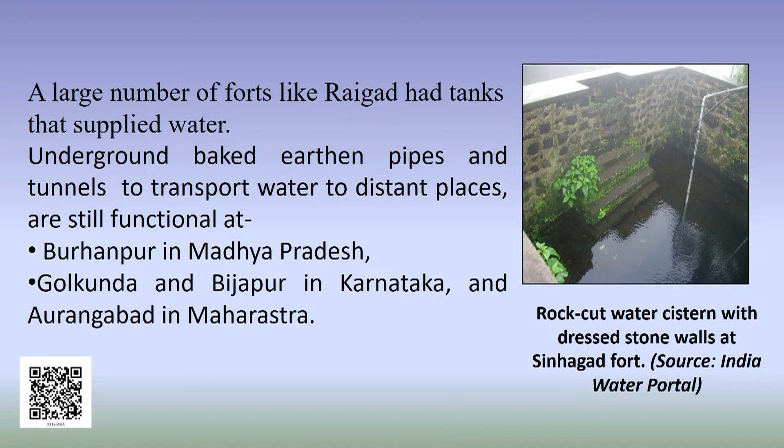Each fort in the area had its own water harvesting and storage system in the form of tanks and wells that are still in use today. A large number of forts like Raigad had tanks that supplied water. Underground baked earthen pipes and tunnels to transport water to distant places are still functional at Burhanpur in Madhya Pradesh, Golkunda, Bijapur in Karnataka and Aurangabad in Maharashtra.

There are some other water harvesting systems found in other states also: Jal Talai in Uttar Pradesh, Haveli system in Madhya Pradesh, and Ahar in Bihar. All are water collecting or harvesting systems. Jal Talai: a reservoir area of less than 5 bighas is called a talai.

Haveli system is a traditional rainwater harvesting and cultivation method native to the Bundelkhand region of central India, especially in Uttar Pradesh and Madhya Pradesh, and it has been practiced for over 300 years and is deeply rooted in the region's agrarian culture. Haveli system acted as a reservoir during monsoon and a cultivable land post monsoon, with provision made to drain out impounded water.

Ahar refers to a traditional agricultural system in southern Bihar using channels and retention ponds to manage water resources, and is also a reservoir with embankment on 3 sides, built at the end of drainage lines such as rivulets or artificial works like pynes. Under the system, channels are dug into the soil, allowing water to flow with raised embankments on the sides. These channels are interspersed with small retention ponds useful for collecting excess water.

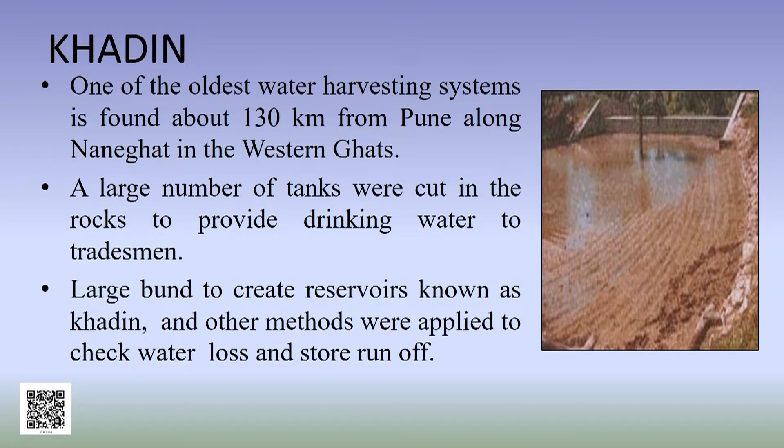Next system is Khadin, and it also is one of the oldest systems. It is found about 130 km away from Pune along Naneghat in the Western Ghats. A large number of tanks were cut into the rocks to provide drinking water to tradesmen, large bunds to create reservoirs known as Khadin, and other methods were applied to check water loss and store runoff. So now we have discussed traditional methods of water harvesting.

Now we will move to modern methods of water harvesting, and there are 2 main techniques of rainwater harvesting. First, storage of rainwater on the surface for future use, and second, recharge to groundwater. Storage of rainwater on surface is a traditional technique, and structures used are tanks, ponds, check dams and many other forms. Recharge of groundwater is a new concept of rainwater harvesting, and the structures generally used are pits, aquifers, trenches, dug wells, hand pumps, recharge wells, recharge shafts, lateral shafts with bore wells.

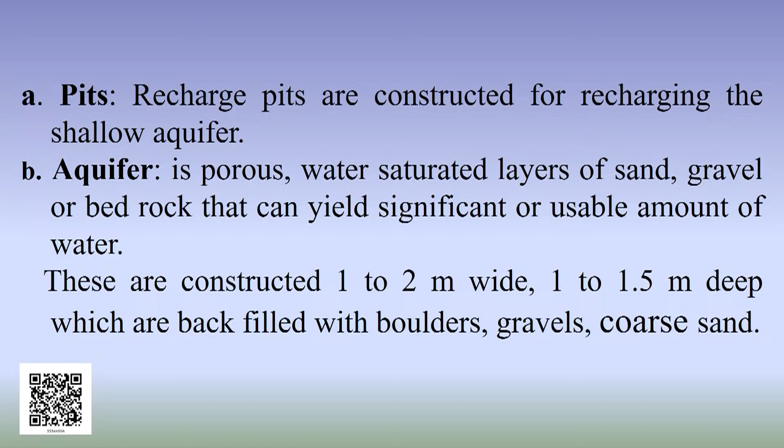So, we will discuss a little bit about pits, aquifers, trenches, dug wells, because we have already talked about tanks, ponds, check dams. So, first we will take pits. Pits and recharge pits are constructed for recharging the shallow aquifer. An aquifer is a porous water saturated layer of sand, gravel or bedrock that can yield a significant or usable amount of water. These are constructed 1 to 2 meters wide, 1 to 1.5 meters deep, and backfilled with boulders, gravels, coarse sand. Water from the rooftop is collected in a recharge pit, where boulders and charcoal filter the water.

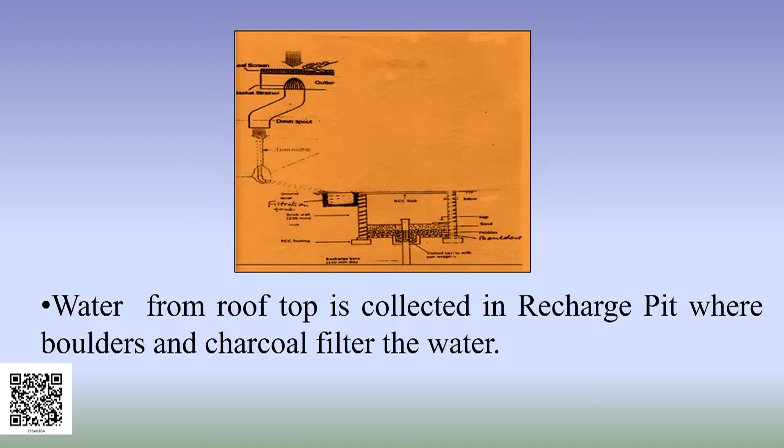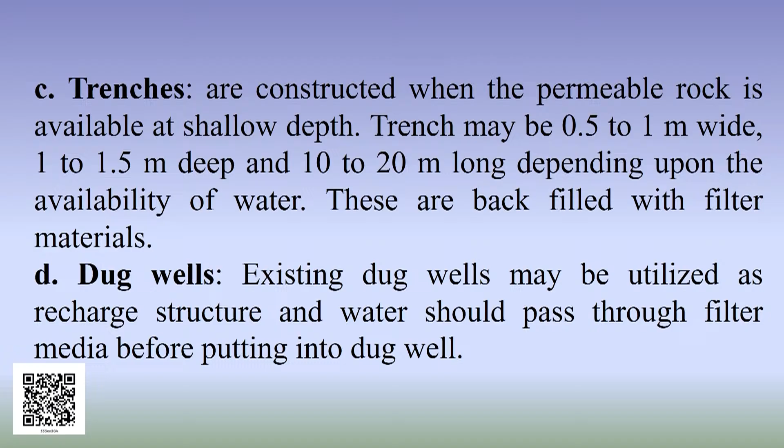Next is trenches. These are constructed when permeable rock is available at shallow depth. A trench may be 0.5 to 1 meter wide, 1 to 1.5 meters deep and 10 to 20 meters long, depending upon the availability of water. These are backfilled with filter materials. Next method is dug well. Existing dug wells may be utilized as recharge structures, and water should pass through filter media before putting it into the dug well.

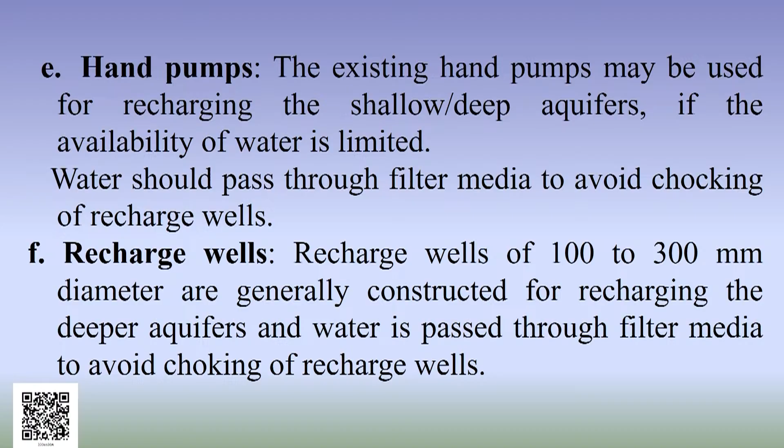Hand pump: most of the population use hand pumps nowadays too. The existing hand pumps may be used for recharging the shallow or deep aquifer if the availability of water is limited. Water should pass through filter media to avoid choking of the recharge well. Recharge wells of 100 to 300 millimeter diameter are generally constructed for recharging the deeper aquifer, and water is passed through filter media to avoid choking of recharge wells.

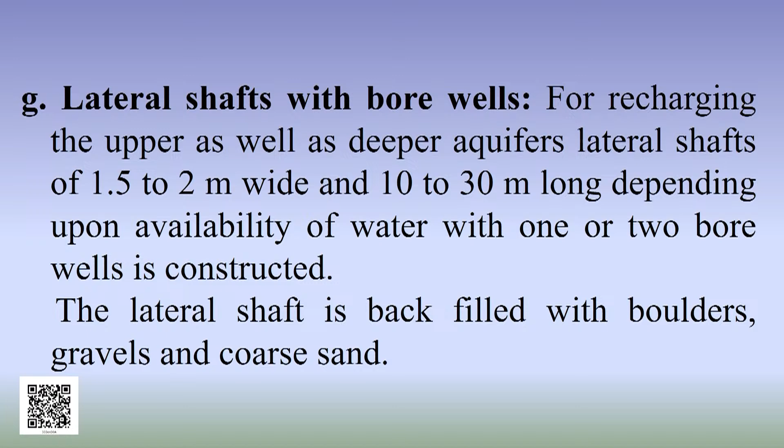Recharge shafts are for recharging the shallow aquifer which is located below the clay surface. Recharge shafts of 0.5 to 3 meter diameter and 10 to 20 meters deep are constructed and backfilled with boulders, gravel and coarse sand. Lateral shafts with bore wells are for recharging the upper as well as deeper aquifers. Lateral shafts 1.5 to 2 meters wide and 10 to 30 meters long, depending upon the availability of water, with 1 or 2 bore wells are constructed. The lateral shaft is backfilled with boulders, gravel and coarse sand. So, the storm runoff may be diverted into the nearest tank or depressions, which will create additional recharge.

Now, we will discuss the diversion of runoff into existing surface water bodies and its benefit. Construction activity in and around the city is resulting in the drying of water bodies and reclamation of these tanks for conversion into plots for houses. Free flow of storm runoff into these tanks and water bodies can be used as a harvesting system.

In urban areas, construction of houses, footpaths and roads has left little exposed earth for water to soak in. We feel it when heavy rain is coming, but all rainwater freely flows to the drains. In the case of rural areas of India, flood water quickly flows into the rivers, which then dry up.

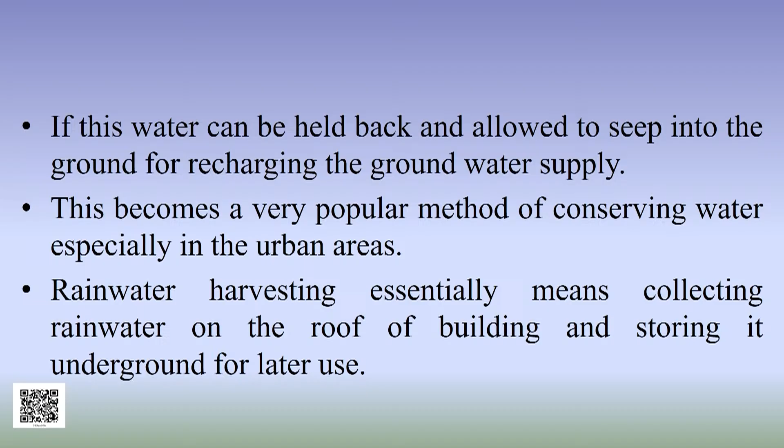Soon the rain stops. If this water can be held back and allowed to seep into the ground for recharging the groundwater supply, this has become a very popular method of conserving water, especially in urban areas. Rainwater harvesting essentially means collecting rainwater on the roof of the building and storing it underground for later use.

So, realizing the importance of recharging groundwater, the Government of India and many state governments, NGOs and other institutions are taking steps to encourage rainwater harvesting in the country. Town planners and civic authorities are introducing bylaws making rainwater harvesting compulsory in constructing new buildings. No water or sewage connection would be given if a new building did not have provisions for rainwater harvesting.

There are some benefits of rainwater harvesting in the form of increased water availability; it checks the declining water table and is environmentally friendly. It improves the quality of groundwater through the dilution of fluoride, nitrate and salinity, and it prevents soil erosion and flooding, especially in urban areas. So, there are several case studies regarding rainwater harvesting. We will take one or two during this program, and these are the success stories.

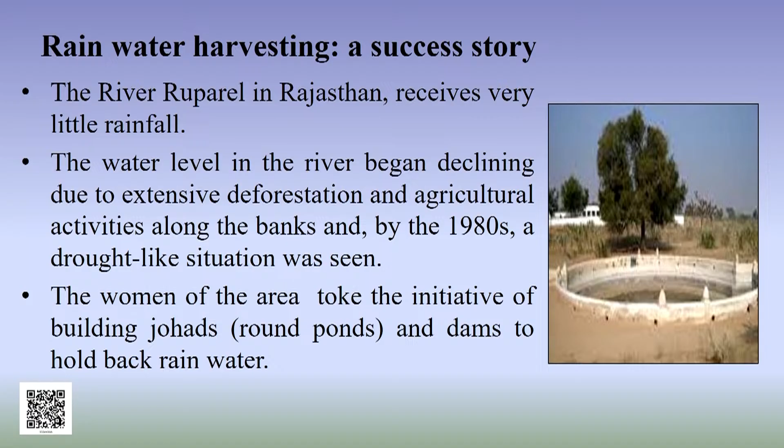The first success story of rainwater harvesting is river Ruparel in Rajasthan. This region receives very little rainfall. Water level in the river began declining due to extensive deforestation and agricultural activities along the bank, and by the 1980s drought-like situations were seen. The women of that area took the initiative of building johads, or round ponds, and dams to hold back rainwater. So, due to water conservation, water is available throughout the year.

The second case is related to Rashtrapati Bhavan, which was done by the Center for Science and Environment, a New Delhi based NGO. Center for Science and Environment recommends the revival of traditional water harvesting systems along with modern technologies. In 1998, the then President of India asked Center for Science and Environment to design a rainwater harvesting system in Rashtrapati Bhavan, New Delhi. The presidential estate is a large area and receives around 800 million liters of water per year in the form of rainfall.

Rainwater from the roof and paved area surrounding Rashtrapati Bhavan is diverted to an underground storage tank for its low quality use. Water passing into the recharge well is passed through a desilting tank to remove pollutants, and CSE also helped rainwater harvesting systems in schools under the Green School program to drain water from lawns. Some of the initiatives taken by CSE are in the colonies of Vasant Kunj, apartments like Surya Vihar, institutions like Ford institution, universities like Jamia Hamdard University, clubs, hospitals, industries and slums too. So now we will take another successful and famous case study, that is Tarun Bharat Sangh or TBS.

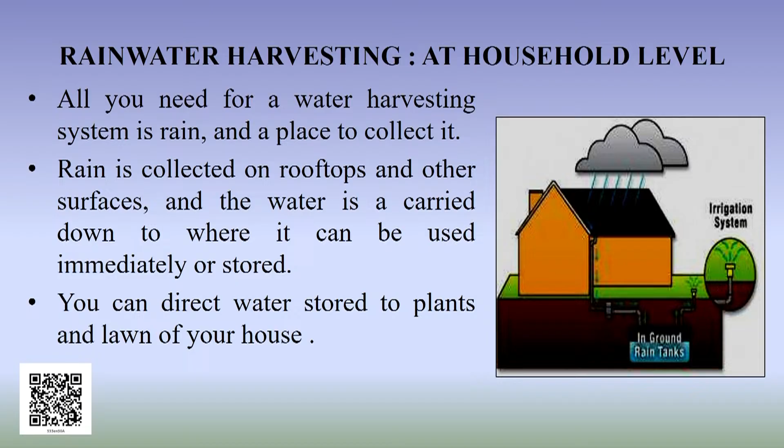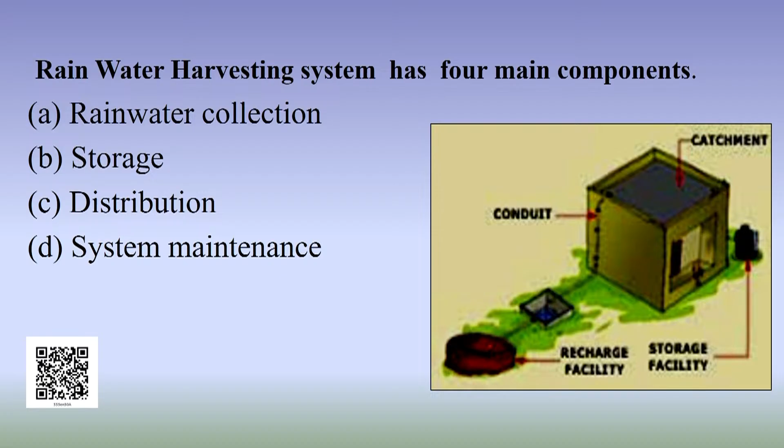We know all a water harvesting system needs is rain. Rain is a must, and a place where it is collected. Rain is collected on rooftops and other surfaces, and the water is carried down to where it can be used immediately or stored. You can direct stored water to the plants and lawn of your house. So a rainwater harvesting system has four major components: first, rainwater collection; second, storage; third, distribution; and fourth, system maintenance. We will discuss a little bit about each component. First we will talk about rainwater collection.

One can capture rainwater from any roof area, patio, driveway or other impermeable surface. Make sure that collected water is kept at least 3 feet away from the foundation of your house. The amount of water you will be able to harvest depends on the size of your catchment area. To determine the amount of water you can collect, multiply the area of your roof in square meters times the amount of rain received each year in meters.

So next, multiply these values. Suppose you have rainfall; we know India has rainfall of 1170 millimeters. Multiply these values by 0.909 to account for evaporation and other losses, and then multiply this result by 1000 to determine the number of liters. So when we multiply these figures, we find 1,05,300 liters of water per year.

So next we will talk about storage. Storage systems can vary in complexity depending on one's need. An effective system can involve a 250 liter drum fed by rooftop gutters and downspouts. A more involved system might include buried cisterns, plumbing and a timed watering system. Debris and leaves should be filtered before storing the water by placing screens over gutters or downspouts.

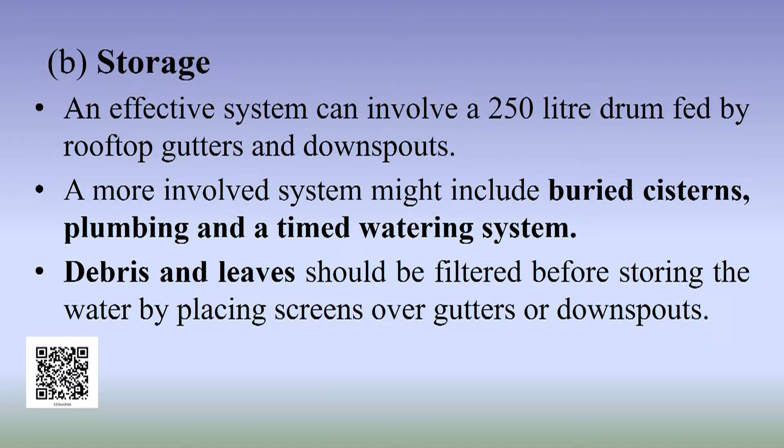Water kept in tanks or cisterns should also be covered to minimize algal growth and eliminate the potential for mosquito breeding, to avoid dengue and malaria. Placing lids on the storage tank is an effective solution. So now we move to the next component, that is distribution.

Gutters, that is a narrow channel which collects rainwater from the roof of a building and diverts it away from the structure, typically into a drain. Downspout is a vertical pipe for carrying rainwater from a rain gutter to ground level.

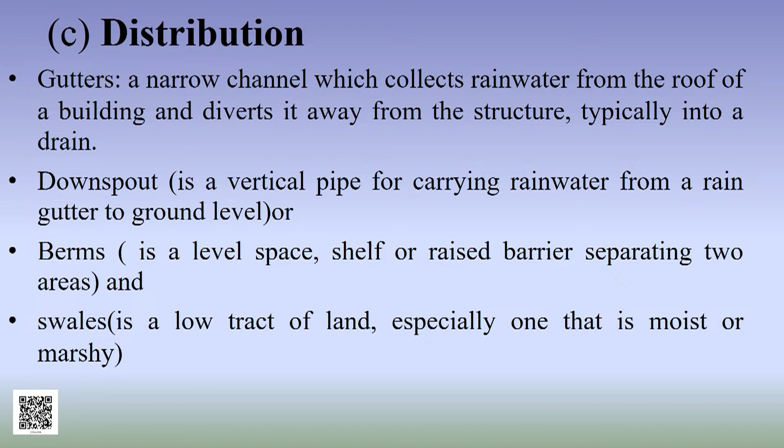Berm, that is a level space, shelf or raised barrier separating two areas, and swales, that is a low tract of land, especially one that is moist or marshy. So, these can be designed to catch rainwater. Any method, any type can be used and distribute it directly to landscape plants or into the soil. Many people store harvested rainwater and then distribute it later through their regular drip irrigation system.

So, next is system maintenance. Water harvesting systems require occasional maintenance and that is easily accomplished. Debris screens over gutters should be cleaned periodically and storage tanks should be drained and cleaned when it is convenient to do so.

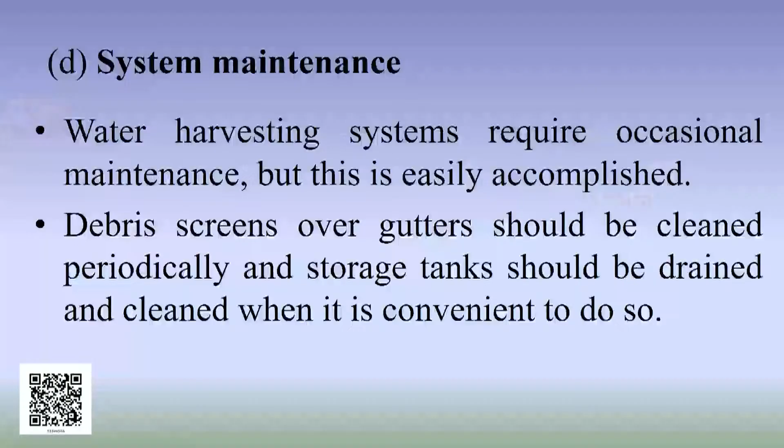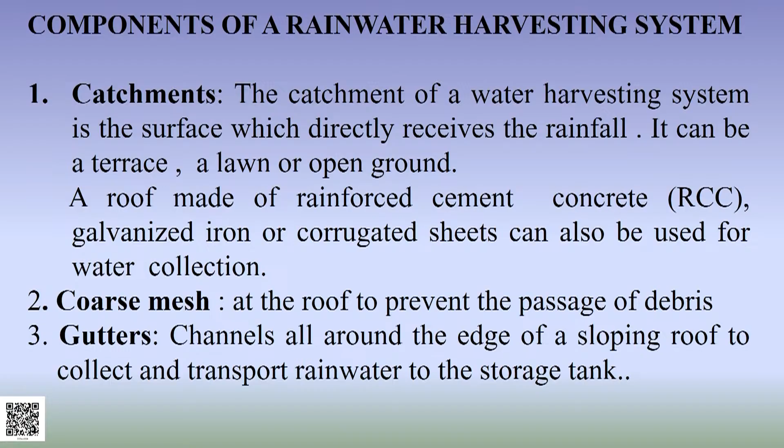So, we have talked about components: catchment, coarse mesh, gutter. So, catchment area we already know is a surface which directly receives rainfall, and it can be terrace, lawn or open ground. Roof may be reinforced cement concrete, galvanized iron or corrugated sheets can also be used for water collection. Coarse mesh is at the roof to prevent the passage of debris. Gutters are channels all around the edge of a sloping roof to collect and transport rainwater to the storage tank.

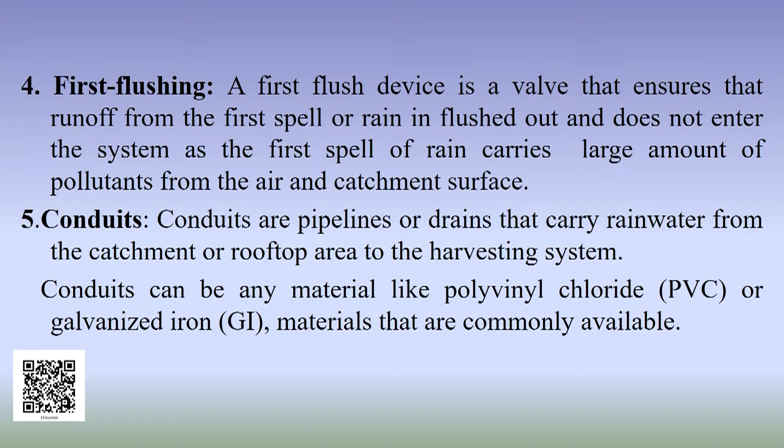First flushing. A first flush device is a valve that ensures the runoff from the first spell of rain is flushed out and does not enter the system, as the first spell of rain carries a large amount of pollutants from the air and catchment surface. Conduits are the pipelines or drains that carry rainwater from the catchment or rooftop area to the harvesting system, and conduits can be made of any material like polyvinyl chloride, PVC, or galvanized iron, material that is commonly available.

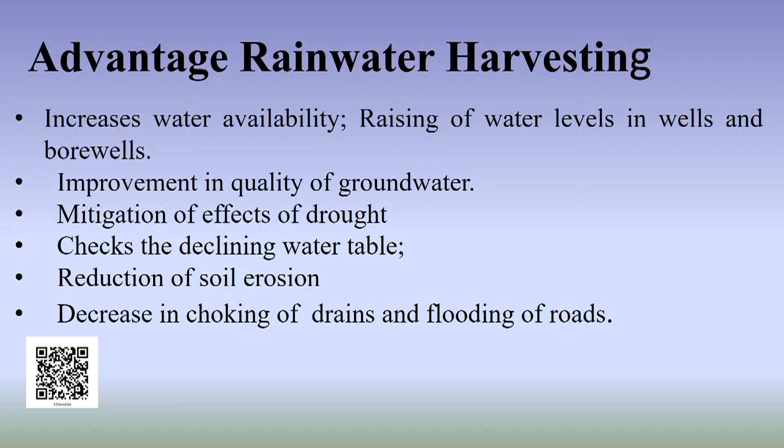So, what are the advantages of rainwater harvesting? First, increased water availability, raising of water levels in wells and bore wells, improving the quality of groundwater, mitigation of effects of droughts, checking the declining water table, reduction of soil erosion and decreasing choking of drains and flooding of roads. So, it is an environmentally friendly method that improves the quality of groundwater through the dilution of fluoride, nitrate and salinity, and saves energy to lift groundwater. 1 meter rise in water level saves 0.40 kilowatt hours of electricity.

And what can a common citizen or an individual do to conserve water? First, do not use soap and detergent while bathing and washing in a river. Do not throw harmful chemicals, refuse and other waste in river water. Do not waste water. Use only one bucket to have a bath. Repair leaking taps and pipes. So, this is all about rainwater harvesting.

Before we wrap up, we would like to recap the main points once again. So, we know earth has plenty of water, 2/3 of the earth is covered with water, but fresh water is only a small fraction, that is almost 3%. With growing demand of water, its resources are overexploited. Although plenty of rainfall occurs in India, due to its uneven distribution over time and space, severe water scarcity is faced in many parts of the world as well as in India.